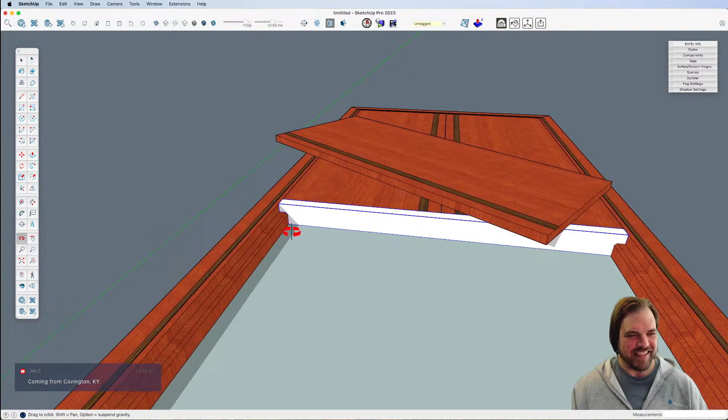Flickering orange light from a nearby fireplace casts dancing shadows across the wooden planks that filled the room. You, brave adventurers, have gathered once more in this familiar meeting place, drawn together by fate and probably a notification that we've gone live. Let's be real here. Until today, the Forgotten Realms knew of only 16 planes of existence. These 16 realms include the material plane, where we exist and all of Faerun exists, the inner planes, where the elements are born, the outer planes, where thought and spirit bloom, and the transitive planes, which allow us to travel across time and space. About a week ago, you received a letter from an unknown individual recruiting you for an adventure through the unexplored 17th plane of existence. Today, we embark on a quest unlike any other, a journey not only through treacherous forests or haunted crypts, but across the 17th plane of existence, known as creativity. Welcome, my friends, to the mystical realm of SketchUp. Here, where the push-pull tool can create dungeons beneath our feet, the scale tool can make any creature a giant, and casting the flip tool spell can make a mirror image of oneself. Our canvas is not only parchment, but the very fabric of imagination itself. As you look across the room, you notice a familiar face, that of your adventuring party leader, Tyson the Bold. Tyson speaks. I love you so much.

Now off to you, my squeaky leadership voice. I hyped up this chat. We're ready to go. Tyson, now passing it back over to you. What the heck are we doing? Oh my gosh, that was brilliant. I love it so much. I just had to do some random movement while you're building this amazing narrative.

Oh, well played. You have established your chops, Charles. Thank you. That's so great. Love it.

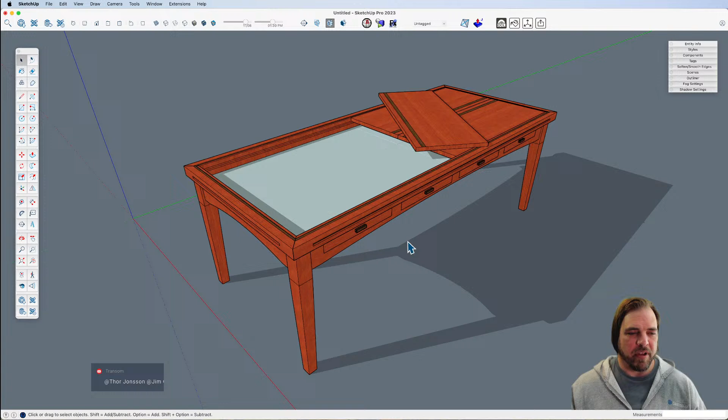Obviously, it's a table, and this is an example of one that I kind of played around with in the past. But often the nature of what it can be is a table that has the potential for storage of games or accessories for the type of games you play. A lot of times the top can be removed to reveal a recess inside the table, and that's for multiple purposes - so that you can easily reset your table and leave all your pieces in place so you can play over time, then quickly put a top back on, continue, have dinner, and come back a couple days later, take the top off and keep playing your game or your puzzle or whatever.

A lot of times they have what you might refer to as a rail system on the sides where you can attach accessories for, again, the type of games you play. So we're going to play with the idea of building a table and then taking it to the extent of adding some of these elements to it.

I apologize in advance if this is the type of exercise... You're spot on, Charles. It's a fun exercise because it's both design and modeling. For me, this is the type of design exercise where I can just start talking to myself and go spinning off into Neverland.

So bring me back if I get too far in the weeds. I appreciate the weeds, especially since I'm going to be following along today, trying to do this myself. I know you're much quicker than I am. Well, don't worry, I'll bring you back in case we need it.

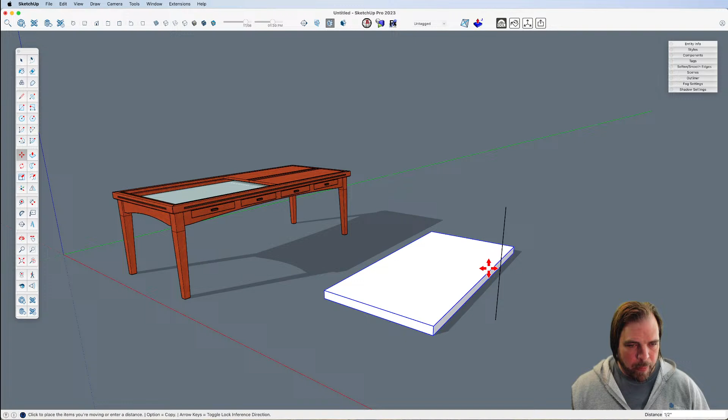We're going to make this, let's say, countertop height, under the idea that maybe we're also making our own chairs if we're doing this. So we'll have a little bit higher chairs since we're playing with our fellow adult friends. So let's bring this up a bit, for a slightly higher table.

So what we're starting with is just a really generic version of, let's say... just a table. We're making a table. We need some semblance of a tabletop up here, so we've got a chamfer on the top here and one down here.

So we'll select this and use a little Follow Me to create something, and then let's say create some legs. I'll make these, let's say, 2.5 by 2.5, and pull this up.

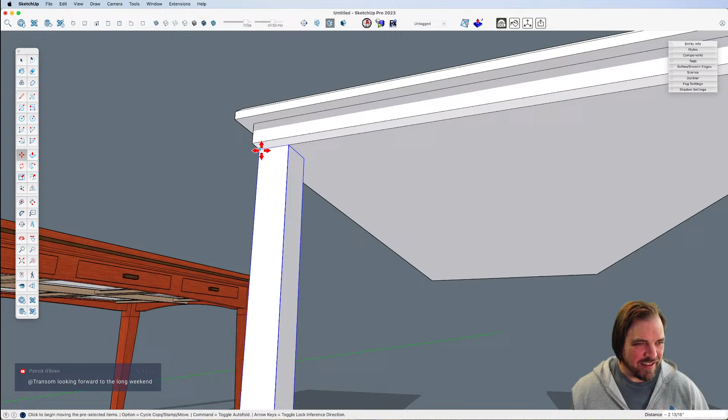Transom says, I originate from the land of Sequoia sempervirens. You know what a Sequoia sempervirens is? A Sequoia's a tree, yeah, it's the redwoods. I think that's what that is. And Keggy in chat says, well, Kegrin is my gaming name, and the wilds of Devonshire, where I roam near the land of pixies and the home of the beast of Dartmoor and the hound of the Baskervilles. That's a Sherlock Holmes reference, right? Yeah. Where the fairies live, the Fae. You're near the Fae, don't be picking up anything random off the side of the road, you may owe them something.

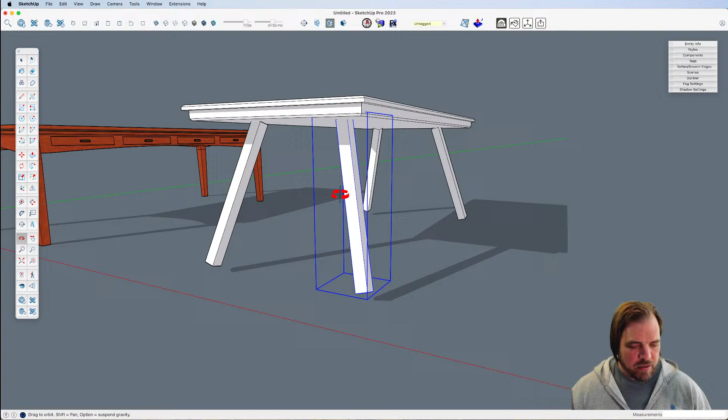So here's where we get to start deciding, do we like these legs coming out like this? Do we want to... ooh, kind of taper nice them? I'm a fan of that, that looks nice.

And this is messy, we're just going to not worry that we've messed up the geometry a bit, we're just trying to decide. I think so, if we do this and then do something like that, or maybe not that.

Okay, so like a bottom, like a little shelf thing. Yeah, it could be a shelf. It could just be that this is just like bracing, or we could do it a different way.

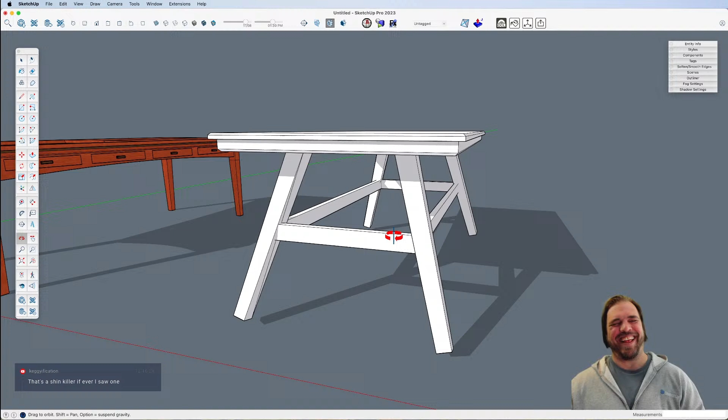Yeah, we're just kicking ideas. People are saying tripping hazards and shin killers. We'll get there. As somebody with very weak shins, I do agree that I would probably have a broken leg if I sat at this table currently. We'll get there, I know. Well, that's all fair points.

So let's try a little different approach and say okay, maybe we'll make the support more of a hay rake table style. Let me cut this out so we're not... we want an inch, and then something like that. Again, we're not worried that we're being pretty messy. That's our so like a little Y guy, a Y brace.

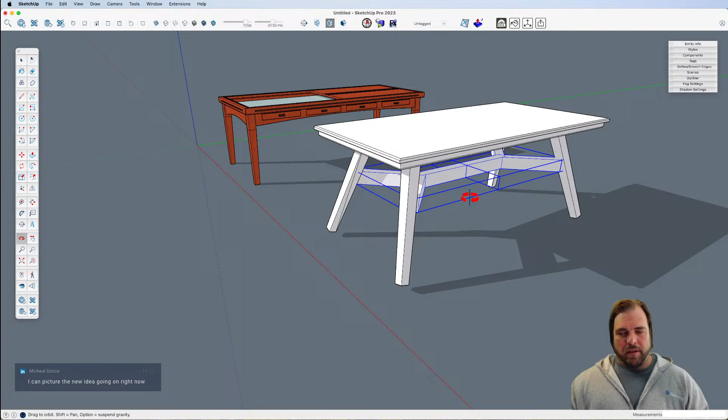And so, yeah, because absolutely we'd be like, okay, how does this - will this break our shins, as people are appropriately pointing out? Things like that. Let's...

Michael on LinkedIn says fancy already. It is pretty fancy, it's a fancy table. Well, we like to get fancy around here. We're just a couple of fancy guys. We're so fancy. That's why I sport this hoodie and t-shirt. That's the epitome of fancy, right?

Anyway, I need to not get lost here, and we'll do another iteration. But so yeah, something like that. Where's my midpoint? Oh, it doesn't want to find it. Curious. There it is, nice.

Okay, so that is an option. I like that option a lot. It's fancy. All right, well we're gonna do another fancy option here. Let's see if we can create one or two more fancy options, and then we'll pick one.

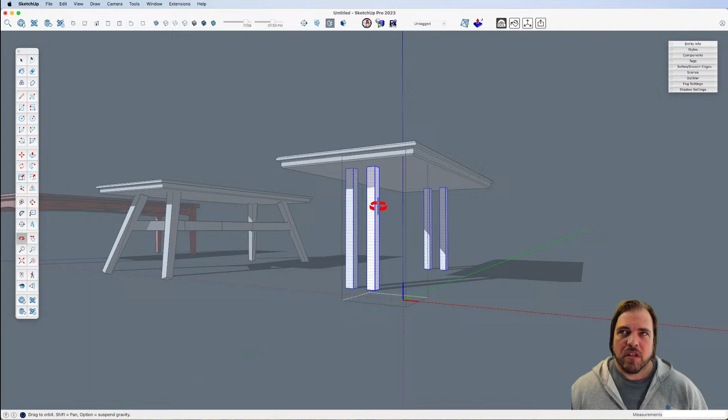All right, this time, okay, let me make these unique. I don't know what to call this style, so as we build this, if anybody does, let me know. I've seen this just generically referred to as modern, or there's tables made by a woodworker, what's his name, Nakashima. I'm forgetting his first name, and he's built some tables with kind of the style that we're gonna do here, but you'll see where we're headed in a moment.

So let's create - is it George Nakashima? Yes, he's - ooh yes, beautiful stuff, right? I'm looking up his stuff. This is fun.

So let's say we're gonna put not quite that much. Let's just put a slight curve on this, and down here put one as well. See if we can...

All right, so let's take this. Now, there's a couple ways that this kind of table gets made. This is funny to me - I thought I was centered, which means this should line up, but I'm not. There's something about this table.

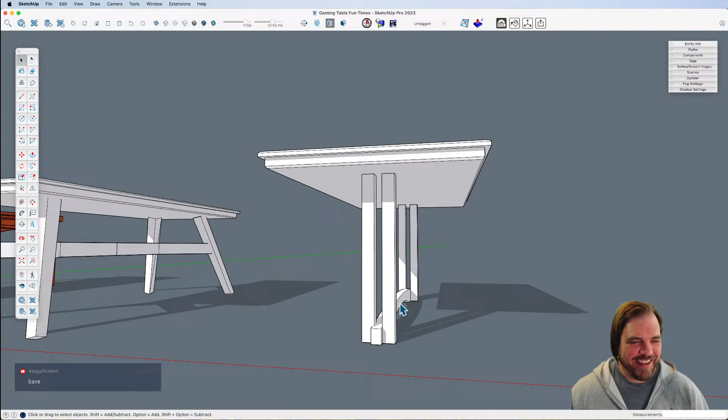Yeah, there's a couple ways that I see in this, like the cross section towards the end of the legs, which kind of act as that brace. Or there's a couple ones in here that are closer in, which is kind of interesting. Both are pretty solid, I like both options here. Yeah, this is gonna be cool. I'm excited to see what you do here.

Okay, so first of all, this is weird. I should have this table... why is this... there we go, I don't know what it was referencing. Anyway, this is the part where I mumble and talk to myself.

So if we do that, and this, we need to center. Let me see, where's our center here? There it is. Maybe a little bit - stretch it out a little bit more. And then this. Let's lock that in place and put it down here. Nice.

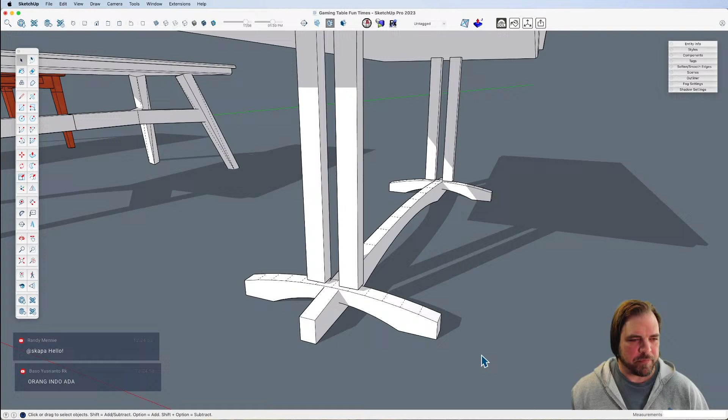You know what, I better be careful with this component. This we need to keep tweaking. Let's tweak this a little more. Let's see what happens if we splay these out a little bit.

We could do that, or we could do it from the top. I could kind of go either way. Let's make that, and then move that out. And then that makes me think we could keep this as a single piece, but I think maybe let's make it double.

Are these the two that you're thinking of? Are you thinking of a third one? Yeah. What was the time?

We should stop regardless at some point. Right. Well, how about this? I kind of want to see what everybody thinks. Actually, why don't we say between these three different styles of legs, like just straight, the one in the middle, and then this one here. And why don't we run a poll? A quick little poll to see what people like. Here's the thing that I think we should consider.

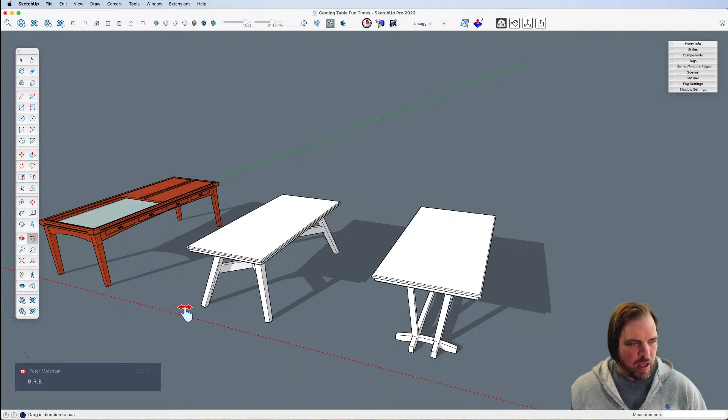When you're deciding, this gets into what your priorities, what your gaming ideals are. To me, we will get the most gaming versatility by a straightforward piece like this, because the design style, I think we can make the top beefier so we have more room, we have simpler construction, we have possibility for drawers and stuff.

As we get towards this type of table, you don't have to, you could put a big beefy top on here, but what you typically see, for I think good reason, is that let's just pull this into like a really beefy top. It doesn't, the design of the legs doesn't lend itself to like a really massive top. So you're just not going to have as much depth. You're going to have a couple different considerations for the top.

So if that style you like, then it might affect how much of the gaming versatility you can add, which could totally be fine based on your personal preferences. That to me is like, as we get more into kind of really refined contemporary designs, if you want to keep it to contemporary style, then it sort of affects how much gaming versatility we can have. Whereas like this one, I would think this one would lend itself more to...

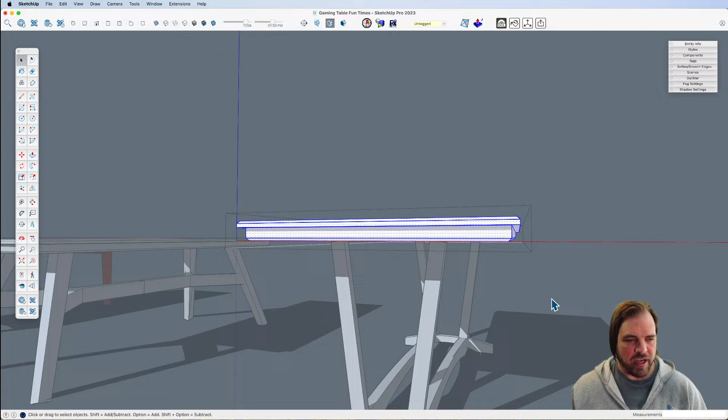We'd take the top of this, we'd take this part of it, we'd kind of recess it so that we get more of an overhang of a thinner top, and then the actual gaming piece would be so. And so these leaves that we might take off would be largely overhanging it, whereas over here they might be inset. Right, all the considerations.

Cool, well let's do this. What's the people's thoughts? Saying that there's toe stubbers, looks a little top heavy. But yeah, let's choose our own adventure here, folks. Let's see what you want to go with.

Can you pan out to all three of them real quick, once you're done with this little spot here, and we can kind of see, we'll just say left, middle, and right? I'm going to run this only on YouTube, so for everybody out of YouTube, I apologize, you can let us know in the chat. But we're going to run this just on YouTube. Let's just do what leg should we go with.

That should be popping up here. What leg should we go with? Okay, that's funny. All right, okay, all right. Interesting. Now the question is, do we do this just straight up democracy, or do we do ranked choice voting? Interesting, okay. All right, hey, how are things looking?

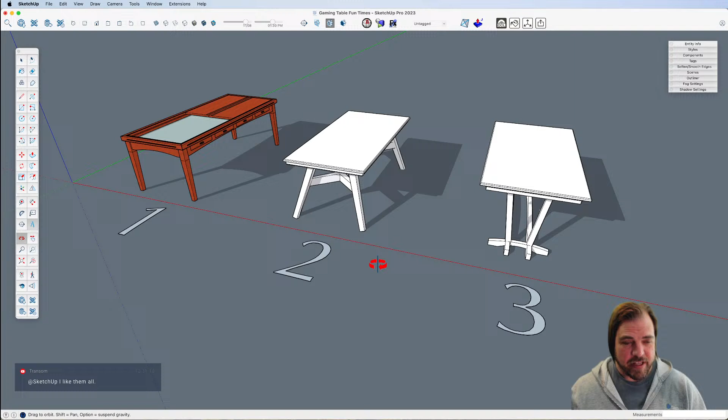Okay, so if we did rank choice, that means we get rid of the middle one, right? And yeah, get that out of there, and then that out of there. Now, cool, we'll run one more test, or one more poll. We'll just say one or three, left or right.

If you want to make my life easier, go left. Otherwise we'll be resolving a few angles, but we'll make it work. Okay, all right, here we go. One or three - sorry for everybody who liked number two, you were outvoted. One or three, which are we choosing here, folks?

Okay, oh my gosh, we're gonna let it go for a couple more seconds here. But this is actually interesting, it's a lot closer than I expected, for sure. Oh goody. All right, the winner with 53% of the votes is number one. Congratulations, number one.

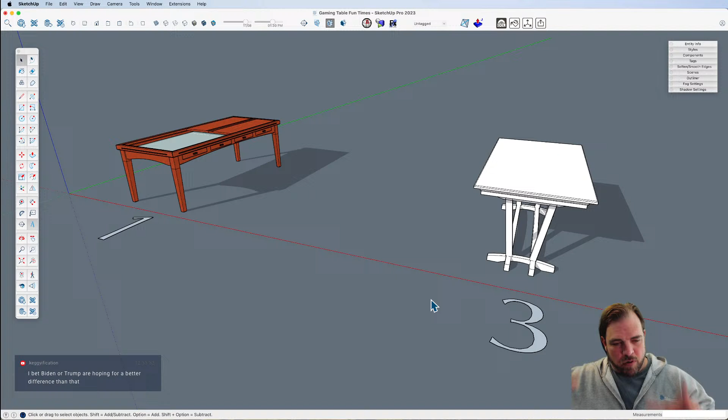Then we'll come back and build what probably is going to give you a lot more versatility. One thing though, I thought would be cool, but we're not going to do it - as I was thinking about this, one of the things I haven't seen anyone do is, there's lift desks primarily for offices and computer work, but now they have lift desks that are specifically cantilevered, made to only be approached from one side, but mechanical lift. Now they also have lift desks with all four legs uniform, and they're quite robust - they'll lift up to 400, 500 pounds. So I think if you really wanted a table like this, you could create just the top and put it on a lift desk, and then you'd have all kinds of versatility on how high you want to make it. Very cool, very cool.

Goodbye. But ciao, it's gone. We got too political - the chat's getting too political on us. Oh no, oh.

Well, all right, cool, that's simple, easy. So let's see here, what do we want to do? Let's say we're creating a 40 by 90 top surface. And again, that's kind of random, but...

So here's a question, and we can just decide ourselves. One of the things is, when you have a gaming table, if you love games where you have a lot of characters and pieces, and your game goes on over time and you want to keep those, then you need a deeper piece in here. Whereas, for example, me personally, the games we might play are just more board games with little chips and stuff, or actually put puzzles on here. And so having it really deep is actually a bad thing, and it would get in the way.

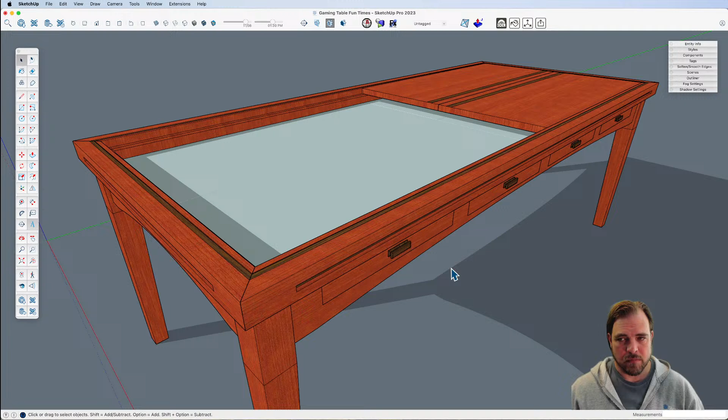How deep do we want to make this, Charles? Let's make an executive decision. How about you, what sort of depth would you think? I personally prefer, when I have gaming tables and stuff like that, one that's just like a nice felt on top of a flat table. The indents, especially with D&D, if you have really small pieces up close or dice, it can get kind of awkward to have that space, but it is easier to not lose things when you have a table like this, so I also appreciate that. I'd say not super deep - let's say, I don't know, what would be a normal depth? A couple inches? Yeah, let's just go inch and a half, we'll split the difference.

And then Patrick in the chat says it needs to be deep enough for the drawers, for sure. I think the drawers would be underneath the actual felt table, right? Is that kind of what we're thinking? Yeah, cool - if we put drawers in it, which is optional in this case, you're correct that this top up here isn't that deep, and the drawer stuff goes underneath. Drawers aren't a typical part of this - I don't think drawers are a typical part of any dining table. Yeah, I agree. Maybe for organization, but a lot of the other tables I've seen keep that stuff organized in a separate spot, like a bookshelf or a chest nearby if you want that similar vibe. So I don't think drawers are necessary in this spot.

Yeah, I'd say a depth where you can leave a game state, like on a chessboard or a board game - let's see, yeah, 2 or 3 inches. Let's see, I'm trying to think for a moment here - are we best to start building the component pieces, or are we better to block out the pieces? I don't know - I warned you all. Let's say 3-inch depth, because that'll work specifically for the use case of chess pieces on a chessboard.

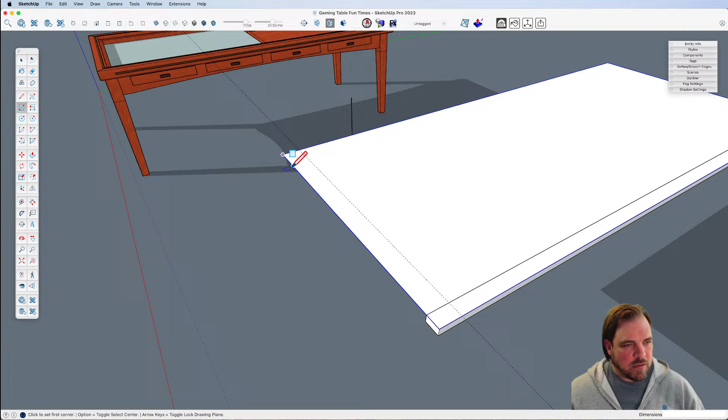Okay, I'm making some general assumptions to start with here.

So we'll move this down to a 3-inch depth. We've got our side and end rails. Let's make...

So what are you thinking right now? I was trying to imagine, kind of like we did with the tables I just trashed, where you create blocks, get them in place so you have the overall larger picture dialed in. Then you go in and start building, and that's just your framework versus this, which is me coming in and saying let's start building some of our component pieces out from the start. I don't know that one's better than the other at any given period.

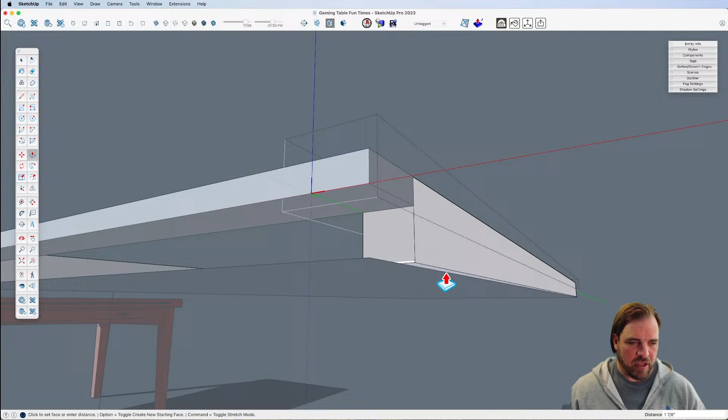As we go, this is where we get to start deciding things, like on this side rail. So let's just pull this down. The way that, okay, let's say we're gonna build out some accessories, so we're gonna have a rail. And if you go out there in the wilds, let me copy this over.

What you can find are a couple ways to approach this. We could say, let's just cut a recess in here. That's what some companies will do, they will glue in a metal bar right here. Or, a metal bar, and then, not to belabor this, it's inset, blah blah.

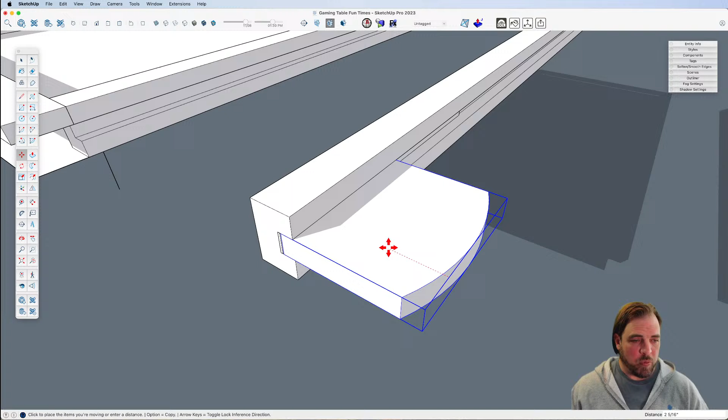But the point of that being, all the accessories have strong magnets glued, attached, or screwed to them, because you can get magnets with holes that you can just screw to stuff. So then all of our accessories would attach straight in, kind of straight. They would come out, they could be shaped however we want, and then they're magnetic, so they fit in. That's one style.

Another version is to actually make this mechanical. So let's say we make this a little higher, and then we would have something like this, where through our routing tools and stuff we'd be creating a piece like this, and then the accessories would look something like they'd have a little piece that looks more like this.

Yeah, this is what I'm used to when I've seen gaming tables. And we'd have to work out that little, like, it sets in here, so we need enough room to tilt it up and set it in. Which, I've seen angled designs where it's more like a triangle, so you lift it up and it kind of hooks in there.

Yeah, example. Actually, this would be a fun part of the process to me, to experiment with a couple of these and see if this would work. We could stick it in here and rotate it into place, and then it would sit. So designing this piece, but...

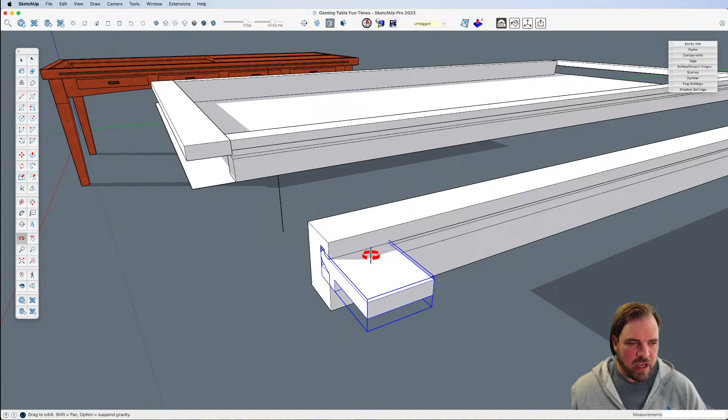Those are sort of two of the rail styles out there. There's also, we could create others where you have an entry point, let's say on the ends of them. This would not let you remove it anywhere along the way, but it would make things simpler because it would just directly go in and then slide over.

So many fun options, what do you think? I like both, let's go with this one. This, I'd say, is a little bit more complex than just having a magnet in the back, and yeah, it's what I'm used to, so I'm here for it. Okay, then we'll hang on to this and make...

JP Sammy says in the chat, as long as my beer is safe, I'm okay with either. I agree, 100%, gotta protect the beer. We will, gotta protect the snacks. That's the big part of it, while we're designing this we're designing places for snacks. So yeah, whatever is safest for our snacks, I'm here for. Well said, we want to keep those snacks well protected.

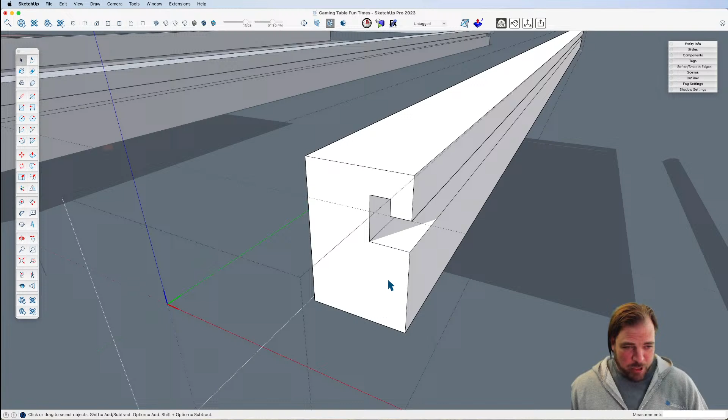All right, so what's your favorite snack when you have a board game night or gaming night? What's your go-to? Same thing with people in chat, I want to hear what you guys think. Let's round it up. I am a sucker, not just for popcorn, I do enjoy popcorn, but I'm irresistibly unable to say no to caramel popcorn. If you throw caramel popcorn in my face, I will eat until I explode. I love that stuff.

I feel that, what about you? I love a good dip, like a good warm dip, spinach artichoke dip, or a really nice bean dip. Always a great choice, a little messy sometimes, but a good choice.

Popcorn with hot sauce from Monica. Popcorn and hot sauce, interesting. I do, okay, I can see it. Hot, that's curious, haven't tried it. Very curious. Favorite snack to go with game night is more alcohol. Valid, 100% valid, I'm here for that.

Okay, I'm trying to create this with a few real dimensions. So I've got 1/2 inch, 3/8 inch height. This is, I think, 1/2 inch deep. And then in total, make it 1 for good measure, although... okay.

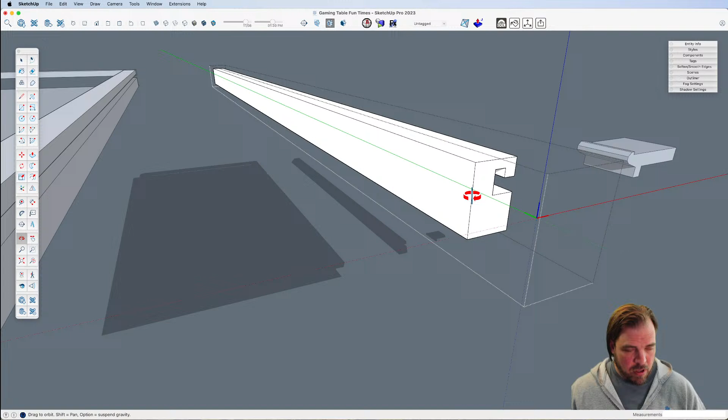So we said we'd make this 3 inches deep. So the top surface, the top piece that's laying on top, we're gonna make that inset, since we chose this one, as opposed to making it just sit on top of the whole thing. I don't know, just because we can.

And then this is the question, Charles. Depending on who's helping you set up this gaming table, those pieces need to be manageable - large enough that there's not a ton of them, but not so big that they're heavy. We can glue those together out of hardwood for a nicer, fancier look, or take a nice plywood substrate, put some awesome veneers on it, and make a beautiful top that's lighter than pure hardwood. At this size, with hardwood you'd need to break it into smaller pieces or it's going to get heavy as heck - you'd need multiple people to set it up if it's not lighter.

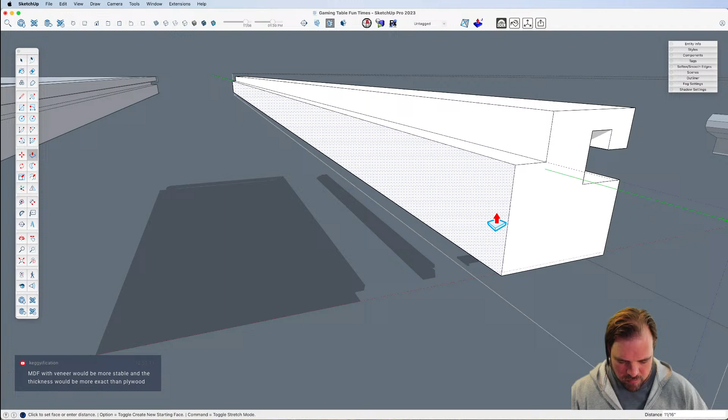Make it 1/2 inch for now, but we'll maybe adjust that.

Here's another question. Are you the kind of person who likes the idea of some LED lighting on the inside? Should we create a track for that? Or are you like, that's just for those Gen Zers who think we need to put LEDs on everything? I think asking me if I like LEDs is hilarious - my entire apartment is set up with remote controlled LED lights so I can change lights as much as I go. I have LEDs, it is.

Everything - underneath my couch that sits right next to me there's LED lights, the bedroom has multiple of these. I am sold on the ecosystem of LED lights controlled via an app. We are going to put LEDs, or at least we're going to accommodate for them.

What I love about that too, especially for the space - like LED lights when you're doing a TTRPG, tabletop role playing games, D&D, you're DMing and want a serious scene, you can easily jump into your phone and slowly turn down the lights to get that nice glow as you say something sinister, like the big bad evil guy starts talking. It's a lot of fun, I love doing stuff like that, it really sets the mood. That is awesome, that's great.

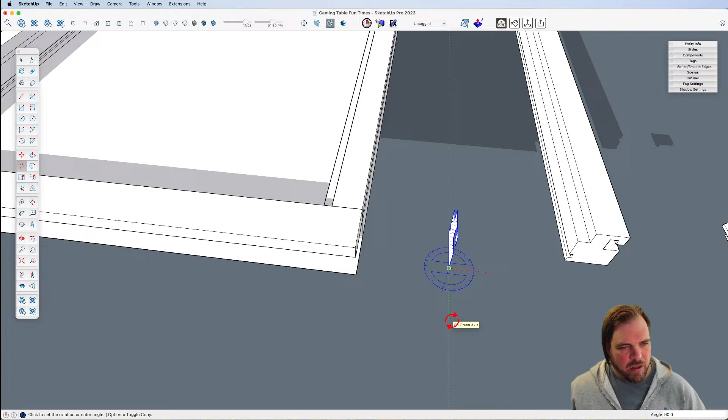Now, decision time again. We left the side linear. We could, on the ends, create ourselves a little bit of fancy and make it a little bit curved. But that would complicate things - we could still make it work, but is it worth doing? Does it help the aesthetic, I think so.

Like the people who are at the head of the table - if you've got somebody leading a game, maybe they need a little bit more space in front of them. That may be a good spot for it, right? I think this would be good, I don't think that's necessarily the worst. I mean if you're doing board games maybe not as necessary.

All right, well let's roll with it, and then we can change it - that's the beauty of what we're doing. How deep did I record? Okay, let's say we're going to do that, but we're still going to incorporate the same rail.

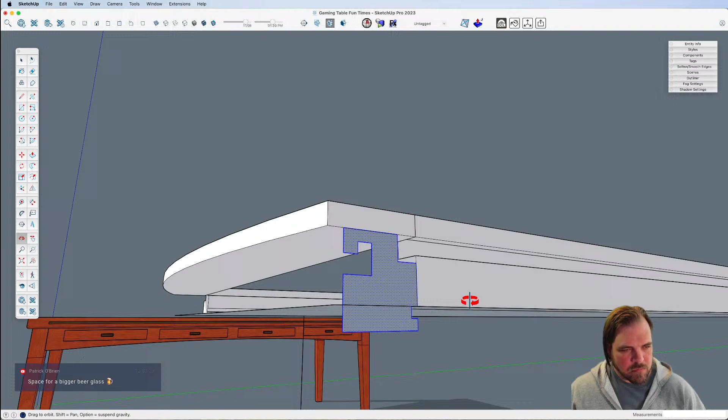Of course, I'm putting this too low. That's what it would be. Paste that in place. Did I? Where did I put that in relation to this edge? Okay.

We did something like that, and that should still work, I think. Yeah. Now, what we should do is not have this running all the way to the end. So let's make this come in to the depth. What is that? 2 inches. And we obviously need to do the same thing down here. So 2, pull that out.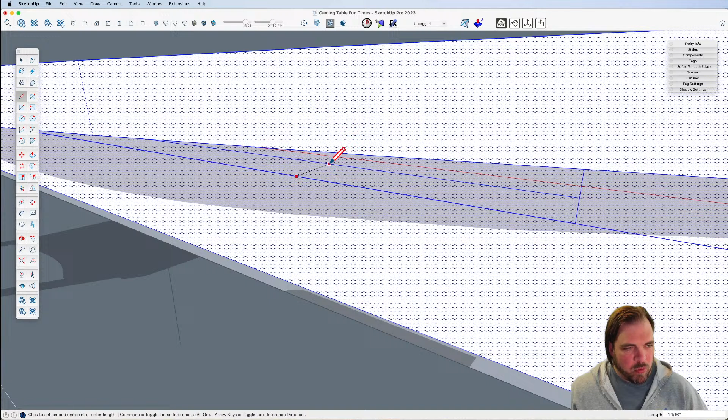The rails only run... so you mentioned notching the ends and sliding it in. That would also work, like having, we could. The notch, we talked it wouldn't be as clean, but it would still work. Yeah. For this one, because we need that little bit of extra room, this might be what somebody was suggesting. You could, to maintain the same one, we just need a little bit of room. Okay, and then this would... that'll work, cool.

Slide in. And then when you slide it over... it'll just work. So it just works. We could do that. I like that, and maintain our same accessories. The other thing, though, that this runs into is then these have to be a lot deeper, right? Right, I mean, I'm sure you would have different accessories for whatever your needs are. And having a couple ones that are just head-of-the-table specific for whoever's using that is fine.

Yeah, so if we like having the design element of a curved end, and that's something that's important, then... throws a wrench. Throws a wrench for sure. We'll keep it for now and acknowledge that we're going to have to make a few unique pieces for the end and a few unique considerations. Cool.

I think... what are you thinking? Well, the way that these two pieces come together, we need to resolve, and either, so for example, right, they need to come together in a way that's going to resolve the inside and outside.

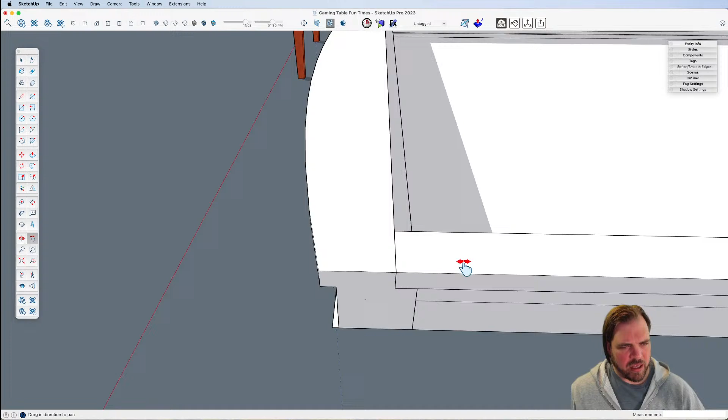And probably the easiest way to do that is just to run these side rails all the way up. And then, these end rails are going to be the ones that are going to require some customizations anyway. So I think, for simplicity's sake, and this is going to be a lamination of several boards anyway.

These, I think, just aesthetically, we'd want something where they have some sort of end. So, do we do something like that? And do we... what the... oh, I still have this. Of course. Decisions to make.

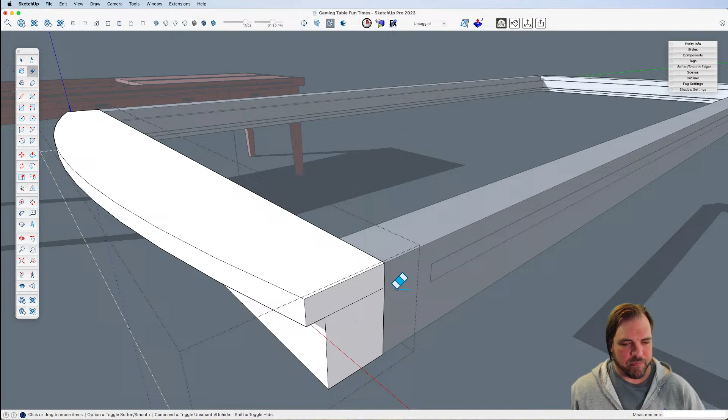Because me personally, now that we're starting to get into the details, that's the perfect part. I want these two pieces to have some sort of transition where they feel like they're part of the same one, and that could just be a simple design element where there's a little indentation or a little strip of different colored wood or something that's going to happen here.

I don't think this was... I don't know if I want to do something like that. Tell you what I'm going to do: dial back how much curve this is. Cool. Dial it back a little bit. Still there, still subtle.

Okay, we have some work to do there. Let's not get lost right here though. Let's get a few other pieces going.

So this is where our inset pieces are going to sit like that. The table bottom, the base, needs to be accounted for.

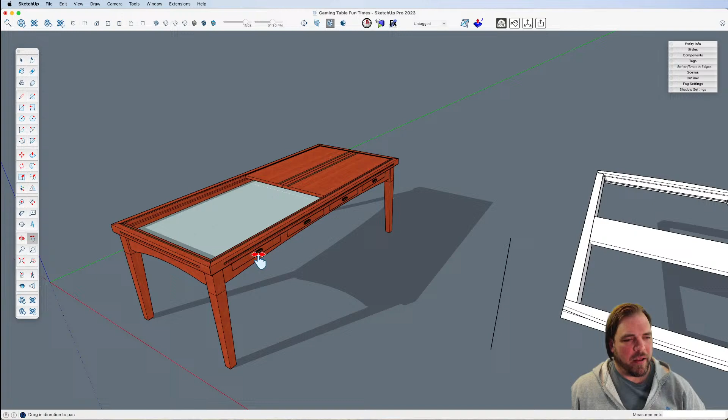Okay, let's decide, because it makes a difference in where we're gonna do this. Do we want to try and accommodate actual drawers in the table like this, which I hadn't planned to do? I don't think it's necessary for this one specifically, since we already have the rail system. You can add whatever you need. We can just assume there's an external place to store things, unless you want to do the drawers. I kind of don't. All right.

But for anyone curious, the way I was thinking about it on this version, let's throw a quick - how did I set this up? Yeah, so this piece I hadn't fully - it would have to come into this side rail, and then underneath, so you're kind of building this skirt out and then building this framework underneath for the drawers, and then the substrate, the main playing surface, sits on that framework.

And probably we'd have just a little indent here, and then - I don't know what to call these things, because there's the side rail and then there's the side piece on top of the rail here. But that's how I thought about it, and then you have enough depth for those drawers.

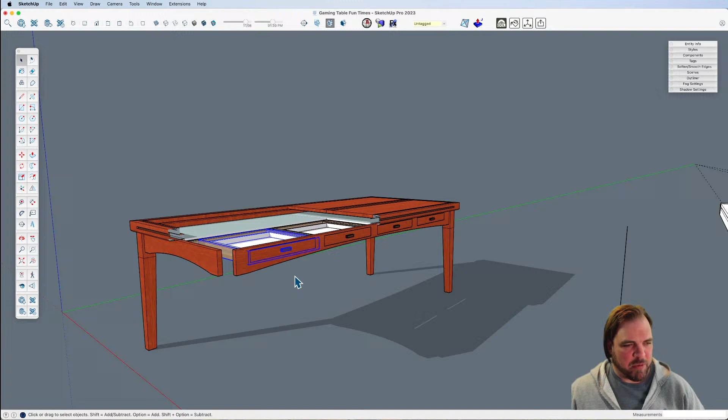But over here we're not going to go that far, so we just need to create some space for...

This again - okay, what would we do? We could float this. We could float that surface inside here, and since it's going to be plywood in our case, it would be just fine. We could float it with they make little rubber stuff that's made for cabinets, so it would hold it tight but allow for wood movement. But with that piece of plywood, I don't think that's that necessary.

Yeah, I'm just trying to think of construction, right, and how we might accommodate for that. But I think, if we don't have to do that either...

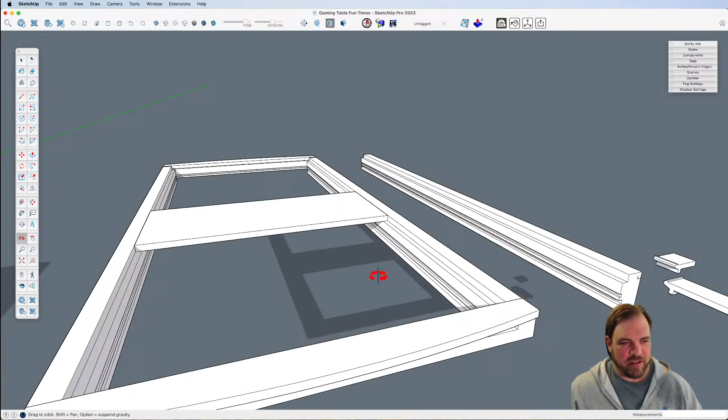I think we're just not going to solve all those questions here. We're just going to say, I'm going to float this in here, for the purposes of what we're doing, and we're going to assume that once we put the top all together - maybe not with glue, but at least with hardware - we want to keep the top as one, and then the legs we can remove, but we'll just treat it like that.

So right, so what I'm saying is, this is our - and like I say, if we were to float this, we would actually make the dimensions a little bit smaller and install it with some little rubber gaskets or something. But we'll just assume all that for the moment. Cool.

Now, if we do that, we still need a way - we have not, this is where we come back to, for example here, where we kind of resolved that the side rails or skirts, however we want to call them, are going to connect directly into the legs, and then these are going to sit on top of it. And we didn't really answer that question over here first. So now we're left answering that question: how are we going to put this with the rail?

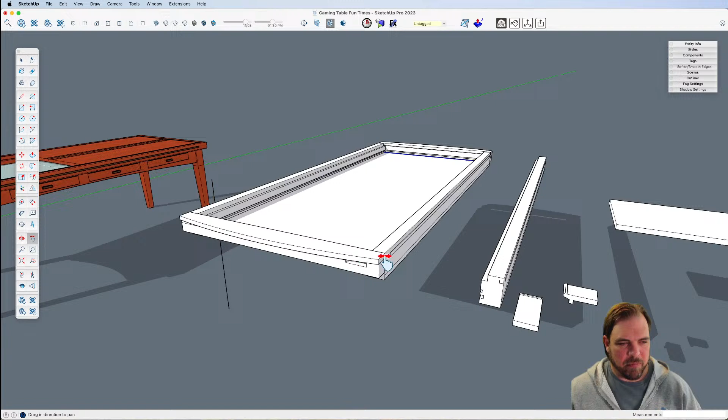So again, probably would have been better to start with a basic and answer a few of the big questions. Oh well, oh well, oh well. Let's start to answer them now.

So I think, again, using this side rail as our main piece that we're working on. I want to... How deep is this? 4. I'm going to see what happens. I'm going to make this... I like the look of a little bit of curve on the side rail here. Yeah, gonna try and add that.

Because we're not adding drawers in this case, all of this is sort of being assembled into this big, massive piece. But let's just see what happens if we do something like this.

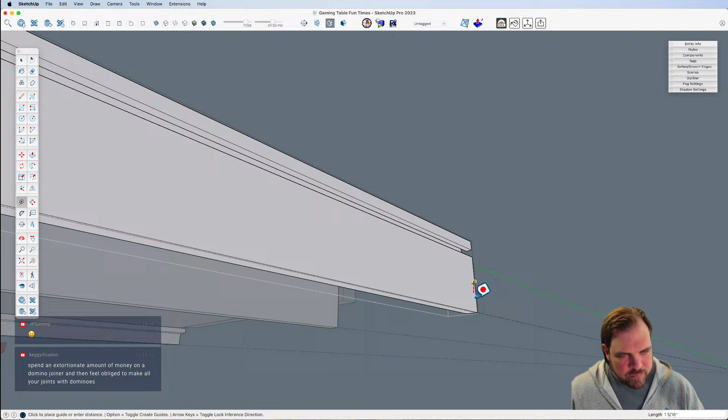I don't know about you, Charles, or anybody out there. This is one of the reasons I think, not everybody likes to actually... some people are really more comfortable with no music, no background. But for me, because my mind wants to talk through everything, it's a way for me to dial that back. So I'm always listening to music in the background because I'm constantly thinking, do I want to do it this way, should I make that 4 inches, how high. When I'm doing any kind of design work, I work better with music, but music that doesn't have lyrics. The moment music has any kind of lyrics, I am not focused on what I should be doing. So my go-to is the Tron Legacy soundtrack. Ah, so good. Get some good old Daft Punk with it. It's definitely what I go with. Love that, Donovan brought that up recently in a different conversation, yeah, that's a great soundtrack.

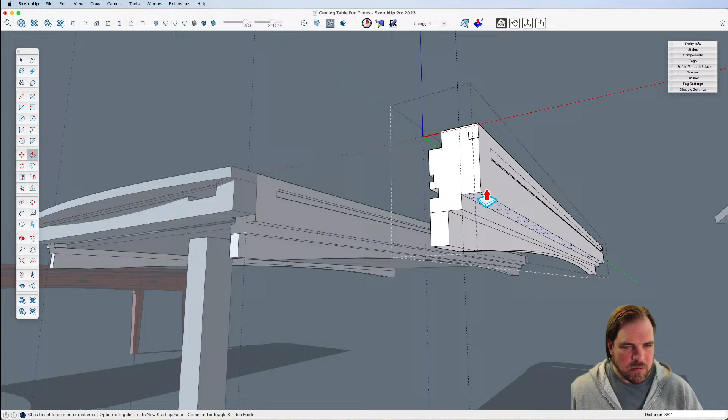Okay, we're gonna say tentative okay for now. And if we do, but then the question is, we could take this and we could put it on the inside instead. What would that look like if we did that and made this top smaller? So, why am I restricted? Probably some stuff on the other side.

This is, oh goodness, sorry everybody. This is 100% what you get from me when I don't have a definitive thing to model and have to figure this out along the way. So sorry.

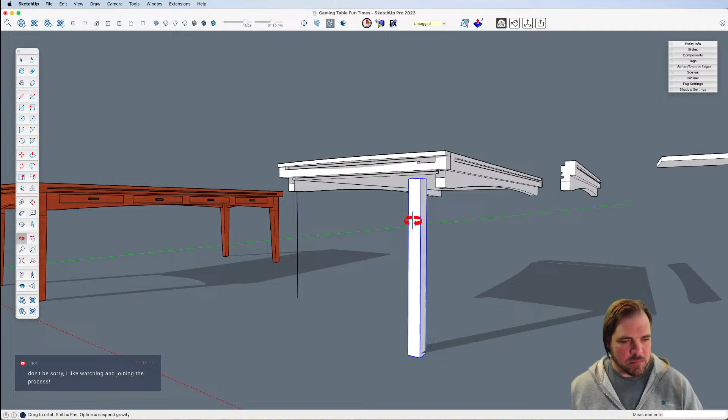And unfortunately, we can't play Daft Punk in the background due to darn legal reasons. But that said, if you have thoughts on how you might do any of this differently, it's always welcome. We got some in the chat, Basil says 3 hours of dramatic music. I like that, like maybe cinematic movie scores. Yeah, I love scores, however that can be a little distracting at times, especially if you know the movie or show really well. Patrick says background music is great. Agreed, no lyrics, lo-fi is always a good option. Highly agree, lo-fi is always great, constantly on in my house. We got a lo-fi going all the time that I'm not doing work.

Igor says, Tyson, don't be sorry. I agree, don't be sorry, we're just enjoying the process here. I agree 100%, I appreciate that. Sometimes I feel, well, I will never aspire, I can never claim to be as fluently funny, or Aaron or some people just talk through this and crack jokes as they go. The more I go down this path, the more I'm just like, what do I do, what's next? And that's why you have me, the goofy goober, to talk and clear up that dead air.

Which, while you're figuring this out, I've got a good segue.

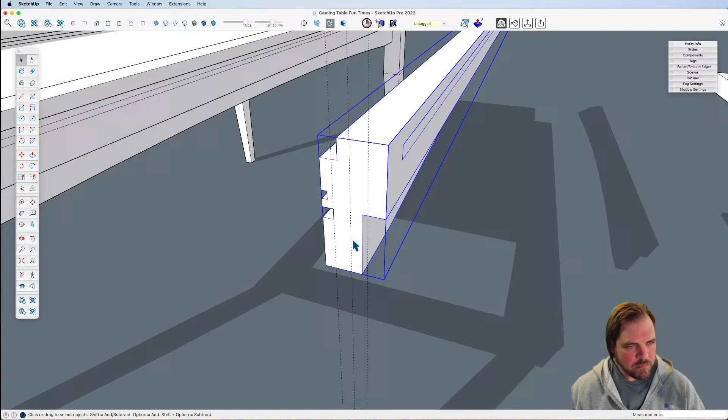So let's say that we've got this would be laminated from several pieces. And with that in mind, we could do it just from like laminate some pieces together, build around that, or something where we take this curve that I wanted to add, and now I'm trying to think if we could.

So instead, what if we took this, and instead what we would be doing is something like, and we'd be building this out of a separate piece, and let's say this would be a piece that we'd be cutting out as one. That makes sense. This one would be a separate piece that we would then attach via any number of things, dominoes, even, because they won't be seen.

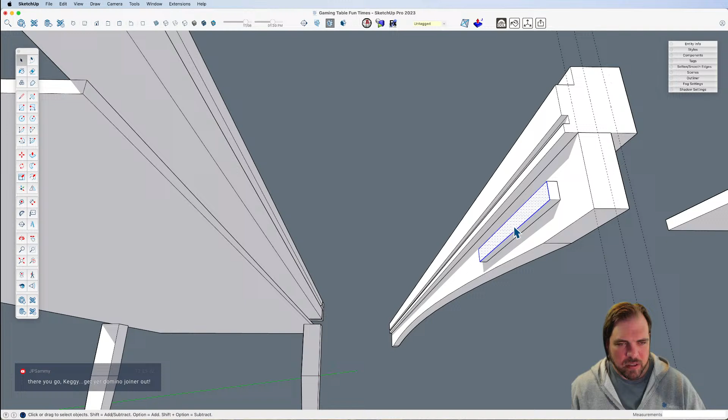Let's go that way. These are separate, these are two separate pieces that we're going to attach via dominoes or biscuits, or if you're a diehard out there and insist on it, you go ahead and make this a sliding dovetail that whole way. Ooh, that's a no. That's a really, really long sliding dovetail, and if you actually could pull that off, that'd be amazing. I'm being facetious.

But this is going to be part of that, and that will make that whole assembly a lot more straightforward. Okay, so that will work that way, and that will make our life easier the other way.

Let's see, so what did make this is 1/2 inch. This is 3. I had 2 legs there. Let me hide that one. So this then, actually 1/2 inch. We made this, I think, 1 1/4. Made it 3 inches.

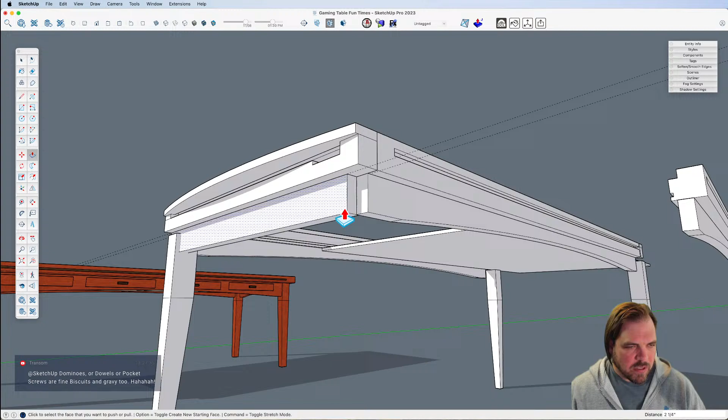And then we made these 4 inches in. Don't have to do the same, but if we did, let's say in theory, it would be 4 inches from here.

I'm looking through our old YouTube videos to see if there's anything that's kind of similar that we can shout out. 6 years ago, we made a modeling a chess set series. Oh yeah, 6 years. That's awesome.

It looks about it from our end for similar things. Any other pieces of content that your team has put out that we can do a quick shout out for? I'm trying to think of some of the highlights that have come recently. Eric did some interesting stuff, kind of playful, where he took one component block and used the nature of how you can scale the exterior of the component to create this whole scene out of one single component. Not something you use on a regular basis, but just kind of an interesting, fun experiment.

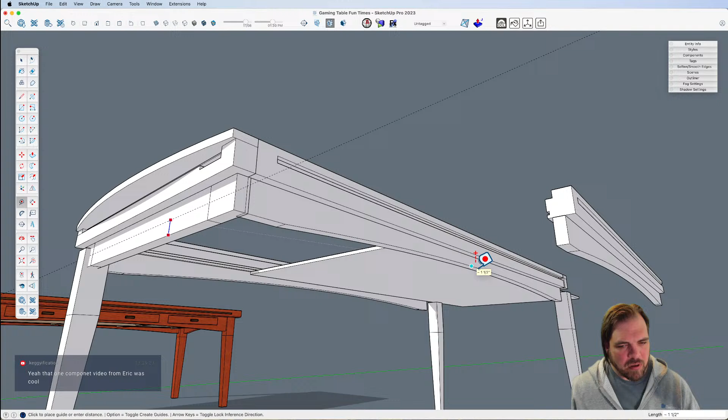What is something that Aaron's put out recently? Looks like there's a rotate with a move tool video that came out yesterday. Cleaning up architectural scale models for 3D printing. That sounds pretty cool, I'm gonna link that in the chat. I actually haven't watched this one. This was just from a few days ago, so I'll link this in the chat for sure. Nice. Got some cool stuff coming your way, y'all.

I mean, the next bit of time for SketchUp is going to be pretty cool. So I'm really excited to show you what we got going on. Can't talk about it though. Oh, indeed. Yeah, the SketchUp development team has been cooking up some interesting stuff that we cannot say, but it is very interesting. Good. It's good. It's pretty good.

I copy this in. I need to get this going. I want to build some accessories, and we're not gonna have time. We got time, unless you have to get out by 2. I know there's no given hurry, but it's just our general try to.

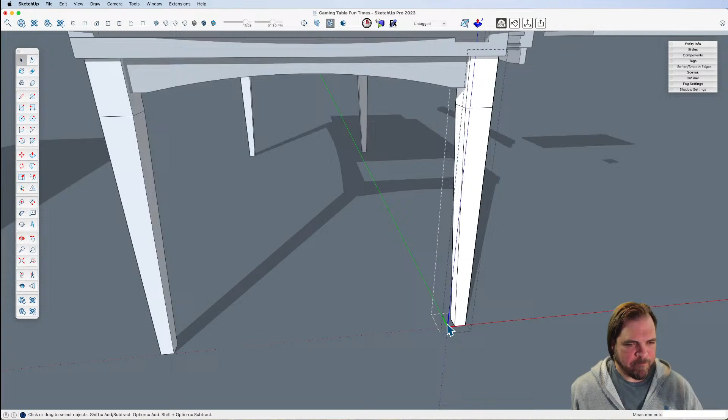It's our discretion. Anything about the new stuff that we can talk about? Any hint about the new stuff that's coming out? They said in the chat. I don't know if we can talk about it. I would say the general vibes of SketchUp this year is really focused on you, the creator, and your needs more than ever before. That's definitely one of the things we're focused on right now, really giving people what they want and need and ask for. That's kind of the general idea. Not everything, obviously, but that's kind of the vibe.

Unfortunately, that's a fancy way to say nothing. That's so true, we can't really talk about it until we know. Why did we bring it up? Oops. Yeah, I'm not going to give any hints. What, are you a cop?

No, honestly, SketchUp's going to be pretty great, future updates are going to be pretty cool. If you want to know what's coming up next, there's always our beta program you can join. We've got some cool stuff announced already, like Diffusion, which is pretty cool. There's quite a bit of stuff in labs, but Diffusion specifically is probably one of the coolest things we've got going right now.

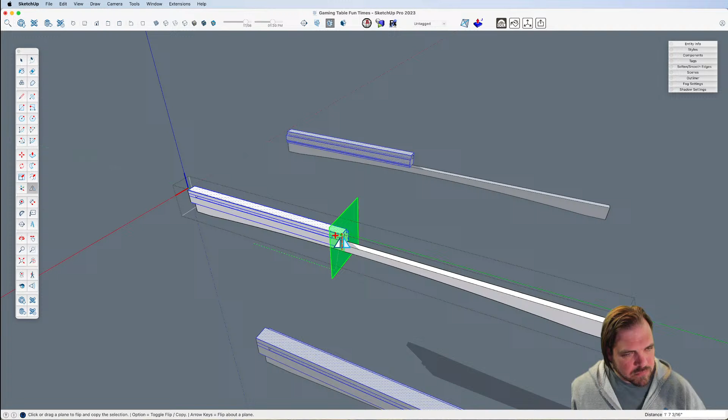Do we have a date for the next release? Yes. Are we putting that out into the world? No, we are not. It's going to be a nice surprise, but I'm not a snitch, I'm not going to tell you the specific dates until I can say with certainty what they are. But it's coming.

How do we know to join the beta program? Great question. It's through the forum, right? I don't know for sure, but ask in the forums, that's probably the best way. When they do open up beta, the one thing I'll say about the beta program is that the people who stay are the ones who dedicate time to really testing it. It's not just a way to get early access, it's supposed to be a way to really put beta stuff through its paces and break it, so that we can fix it in time. I'd want to check in on the forum, the community is where they normally post about openings for the beta program. Let me see if there's a specific thing... yeah, they'll have openings specifically through the forum, so keep an eye on it. They make posts regularly to add new individuals to the beta program, that's the best place to do so.

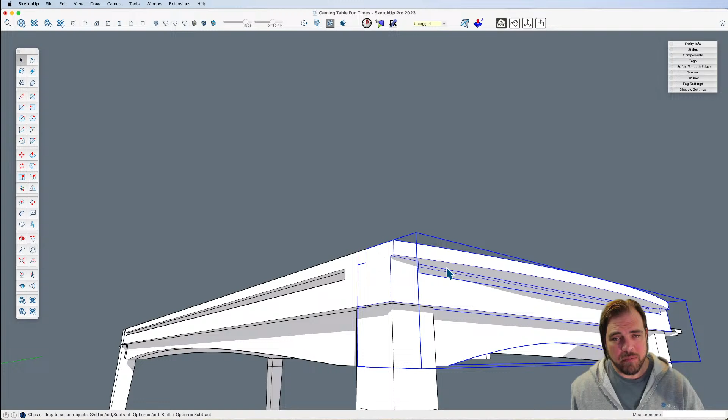I really like how they released Diffusion, it's in beta itself, kind of. We released it before it's fully baked, and this is something we're trying. I really appreciate that the powers that be did this, because it's totally available to use. It's not in its final iteration, but we wanted feedback early.

I love that it's just available out there. We haven't really talked about it much externally, though you've probably seen us do videos on it if you keep up with the channel. But it's a great tool to quickly show off visualizations of your work. If you have a client that asks for renders on a regular basis, it's a very easy way to give them that information, and to create what you need as quickly as possible without going through the extra steps of rendering.

It is nice, and it's built on stable diffusion.

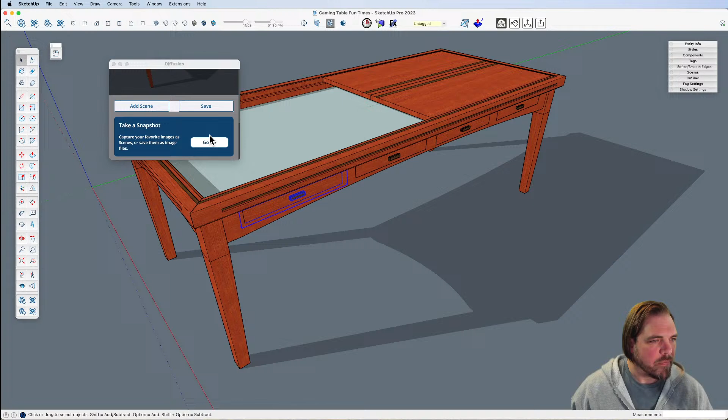So yeah, if you haven't tried it, you just create a SketchUp image. Let's see, here, I don't think I've got it installed on this, do I? I think if you don't have it directly installed, it's through extensions. Maybe I do have it... let me check. I've got too many in here. Let me save and we'll do a quick iteration. Let's see what happens if we break something. Of course. All right, forget it, I don't want it. What do I have open?

Oh, and don't forget to save if you haven't done it recently. I did, remind me, what am I missing here? Do I need to add a scene first? And then I clicked through without doing that. It's been a while since I've used it. So if I add a scene and save... there we go.

Let's make a pencil sketch.

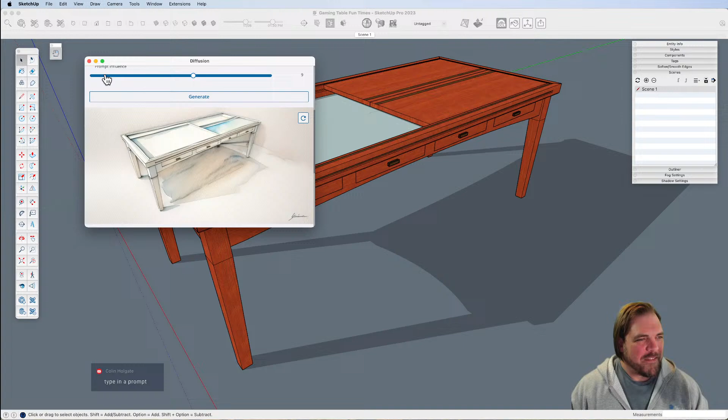All right, diffusion, okay, back to the table. I was trying to... back to the original stream, back to where we were. I was trying to resolve how these corners are going to come together, and then we should build out a few...

Why did my mind go blank? A few... accessories, that's what I was trying to think of. Accessories. Okay.

I'm curious, since we're dealing with our accessories. We tweaked our accessories and we made this just a little bit, because I'm sort of hung up on this idea that I want this to flow, this corner to feel like it blends better than it does. Just a little bit of a lip there would do it. But then, of course, we're going to have to modify our accessories. But let's see if we can do that.

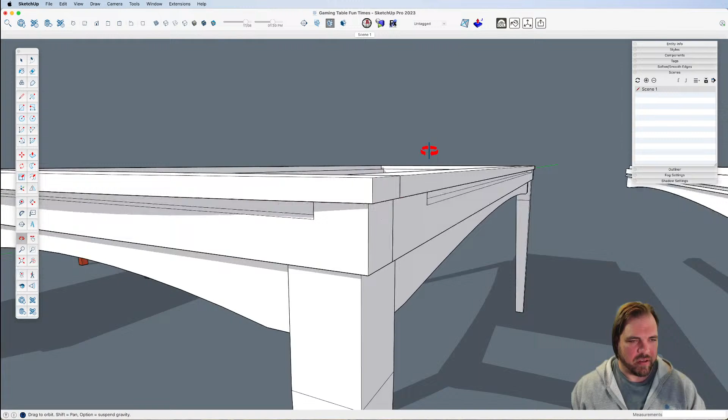Problem with this, not really a problem, but once I get this corner dialed in, that'll be perfect. I will need to go and fix the other corners, which, as long as it works, I may save for another day.

But in theory, now, the way this would work is we've got this come in, this board would have a cut out for the leg. The leg would have hardware that would attach to our sides.

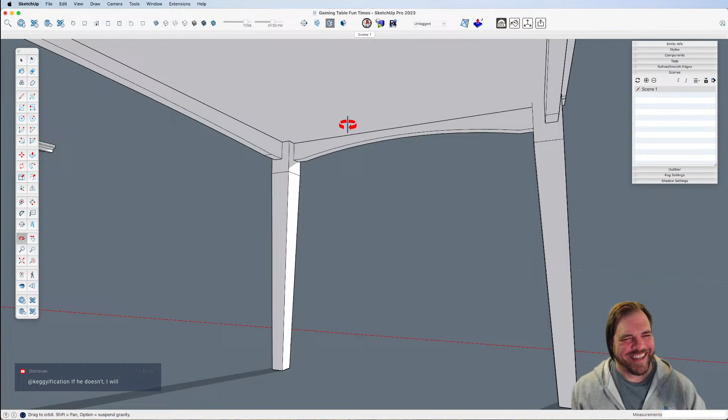I did not pull that off of AI. Had to throw it in there. I am so skilled at this.

I would love to build a table like this. No promises though, but man, wouldn't that be fun? If somebody will cough up the materials, because this is a bit of materials going on in here.

Like that, I think we've got that down. Okay, for the most part, we have the corner dialed in, and I think it'll work. Under here, we would be keeping this top up by just simply screwing in or something, some pieces, little brackets, along the way, along all those sides. And that would work fine.

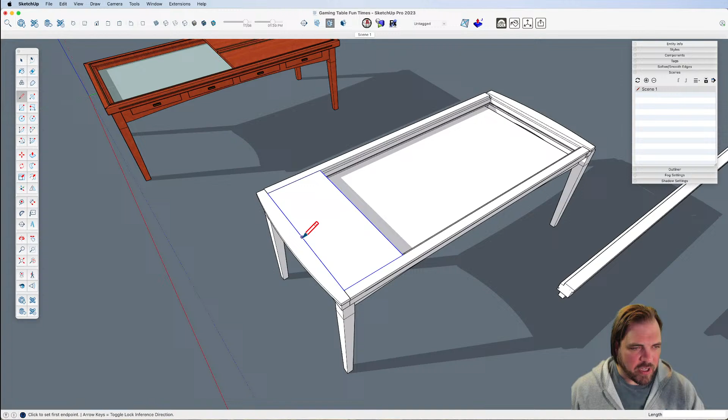So, the top, don't know how many of these we need, but let's find out. Oh, I don't have this fully resolved, so my distance is going to be wrong. Hold on, I better fix a few things.

You've got this. I was trying to be lazy, trying to shortchange y'all. My bad. How dare you? I know, this is your bad. You need a public apology for this misstep. I deeply apologize, that was very insincere of me. You need, if we're doing a whole YouTube apology, you need a ukulele in there. I can't play ukulele, my daughter can a little bit, so I'll have her play ukulele for me. Okay.

Everybody's saying good job, that it looks great. Oh sure, it looks great because you are doing such a good job. Will it?

This is not yet fully resolved. See how this side we've got stuff better aligned than this one. So a little bit of work to do still, but let's at least put this together.

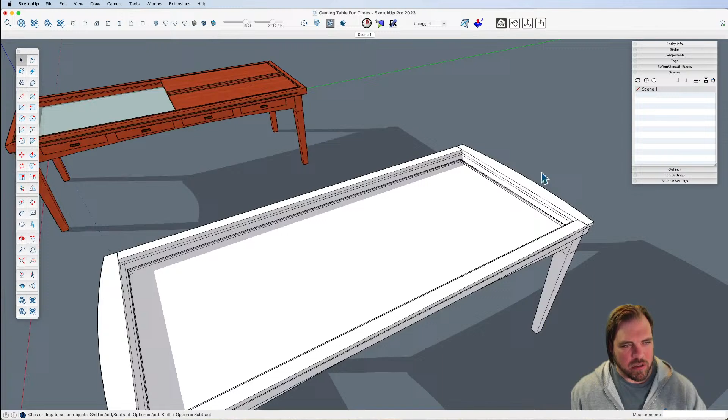And then this goes, can't tell where am I, somewhere in there. However, this will give us the ability to say, how long is that? 7 3/4. Great. How many panels do we want, 5 or 6? Let's find out. So if we select this line and divide it, 4 panels at 1'9" or 5 panels. Let's go with that. Each one is basically 17 inches. Let's try that.

Did I make that a component? I better have. Okay, good.

Like the rails, there's different ways these go together, and a common thing is to have some sense of overlapping them, or a channel here so you put a rubber gasket in, and on the other side a bit of a tenon so they fit together. Some places have magnets on the ends so they hold together, but that's to prevent spills seeping through.

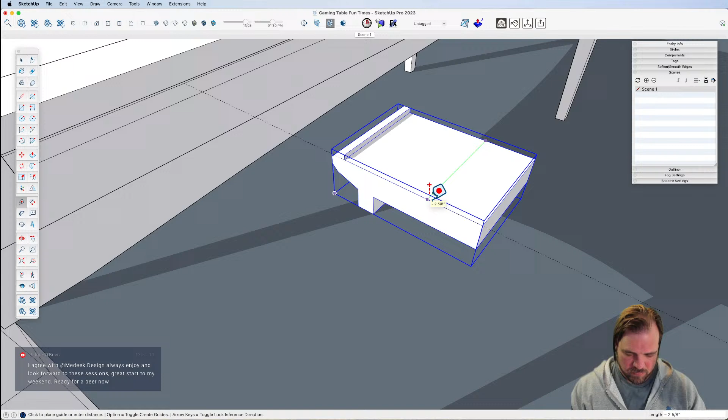Right, yeah, I've seen them. I've seen the jigsaw puzzle kind where it just snaps into the other one. I've seen one of my friends who makes these for a living do little magnets too, so they stick really nice and have that nice little clunk to them.

Somebody in the chat said there's not much of a Tyson boneyard. Are you not into the boneyard anymore? This is very clean for Tyson. That's fair, that's true.

If you've been here the whole time, you saw we had two other whole tables here, and I've been pseudo-deleting and working on the side, so thank you. I've erased some things as we go, but the ghost boneyard is there in spirit. I'm still very much the leave-stuff-all-over-the-place guy. No worries, got it.

We're not going to worry about making this work perfectly since I added a bit of a lip, which means we need to readjust how this goes, but let's create a few accessories. First one, we need a cup holder. And that clearly is the best size for any cup - a regular cup size right there. It's perfect. Defy you to.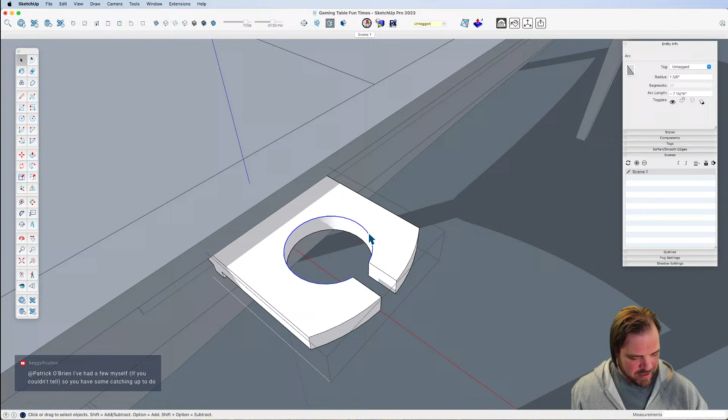You know what? I changed the segments, so let's match them. I made them, actually I don't even know what it is because I cut my circle and then made the resulting curve a different number of segments, so I won't be able to match it exactly without going back and being more careful. Oh, well.

I'm being so messy here. It's because you think we're running out of time. I kind of do - if you want to just rack out these last few minutes, let's just speed draw the rest of this.

And you're right, it's arbitrary. Let's fix this up. Okay, so cup holder with the insert you got off Amazon. Heck yeah.

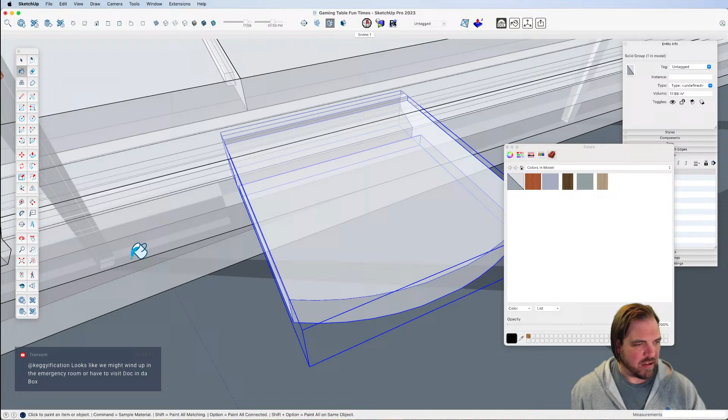We need like a little dice tray. Yeah, so this one - this is where I love ThomThom's Solid Tools and CleanUp because they just clean up a mess like that. If you get rid of a few surfaces and just leave loose edges, it'll clean up all those edges real quick for you.

We'll make it a little smaller. And it doesn't need to be much, you know? Nah, I've got little dice I keep next to my desk at all times - the LED ones that just light up when you roll them. They're great, I love them.

That's grand. All right, little tray. Then...

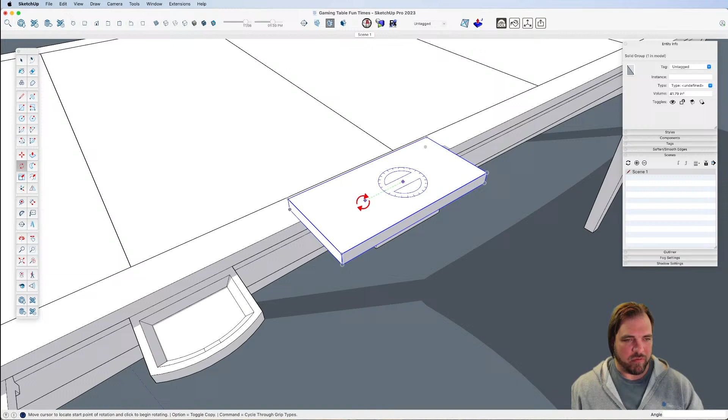I saw one that I thought was clever, really clever. Let me just quick describe it - it was something that could attach, and then it lifted just above the height of the table, and then had an entirely another piece, and the whole thing was on a pivot, so you attach this, and then you could rotate the whole thing and do whatever you want with it.

We are creating a lot of scenarios today, and people mentioned in the comments how every single limb is going to get pinched somewhere on this table, and I'm here for it. That's definitely part of the experience - the ambiance is that you come away bruised from your gaming table. I thought that was a given. No, that's why we're trying to make all these edges nice and easy going, but it's true.

All right, this one - let's say this one comes up another.

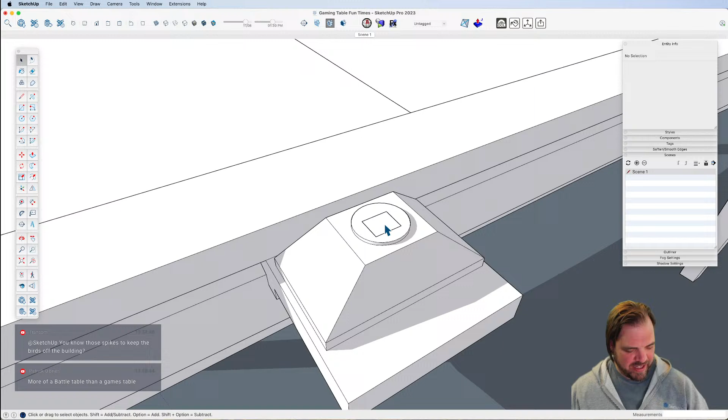Have you seen any of those videos that are like roll for coffee or roll for sandwich? Basically, people have a game table, or a rolling table with 1 through 20 of a list of different things for different parts of the sandwich or coffee. They roll to create each individual part. If they roll a 1, they have to use the worst possible, oldest bread imaginable. 20 is the highest quality bread you could buy at a bakery.

We should find something we can do with this. Roll for SketchUp, where we don't know what we're designing. Donovan suggested that this morning. I was like, I can't put together a list and pull it off, but he said what kind of table should we make, what kind of style - modern, contemporary, craftsman, big old chunky farmhouse style. He said you need to put all those into categories, create several sets of categories, and all along the way you roll, then you model that. That's a good idea. Donovan and I are on the same page. It's a totally fun idea, I'm a little intimidated by it, but it's totally a good idea.

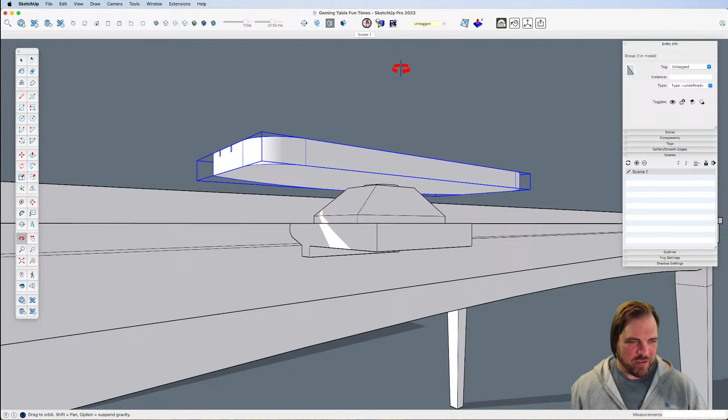All right, so this has a tray for some pieces, and then multiple cards can sit in here, and this whole thing - let me give myself a little reference - depending on how you're sitting and stuff, just rotates.

I don't know, Charles, you tell me how ridiculous this sounds - you could have one of these, same idea, on a spindle of sorts. But the top up here - let's make this some version of basically a dice. You could take this whole thing, maybe put in different inserts for different numbers, or what type of sandwich you're making, and then you spin this whole thing and get results.

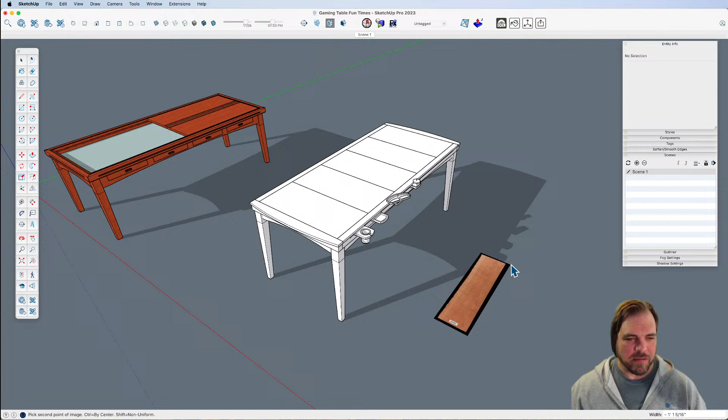Kinda like a fidget spinner. I've seen stuff like that, instead of an actual die you're rolling, it's a circular wheel that lands on specific numbers, with some mechanism inside to allow for more random results. I've seen some cool stuff with that. That's a really great idea - honestly, a little spin top, you just spin it and it lands. What am I thinking of? But anyways, I think that's a great idea, especially for people who forget their dice.

All right, well, we're going to call it fairly good. Let me see if I can throw a few textures on here.